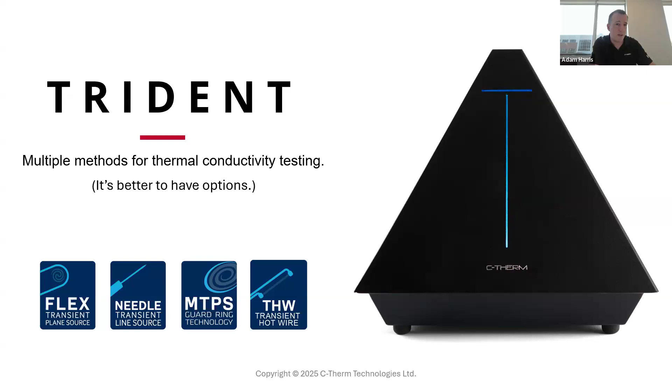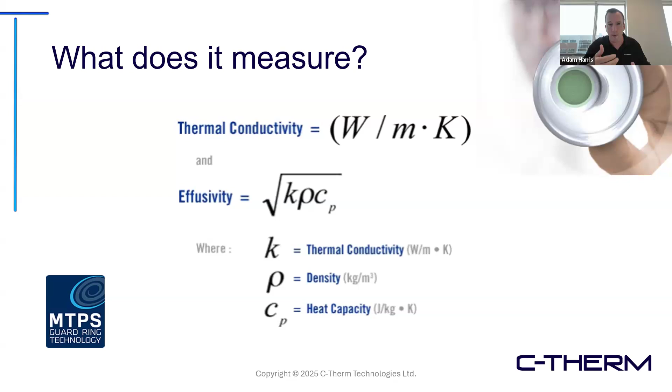It's sensitive to composition. So when we talk about fillers, this has a very significant effect in terms of the dispersion or distribution of the filler in the material. It's sensitive, if you're looking at powders, to the crystallinity, to the morphology, to the shape and size of these things, the densification of the material. All of these work together in influencing the effective effusivity of the material, which is one reason we like it in a lot of different process monitoring applications.

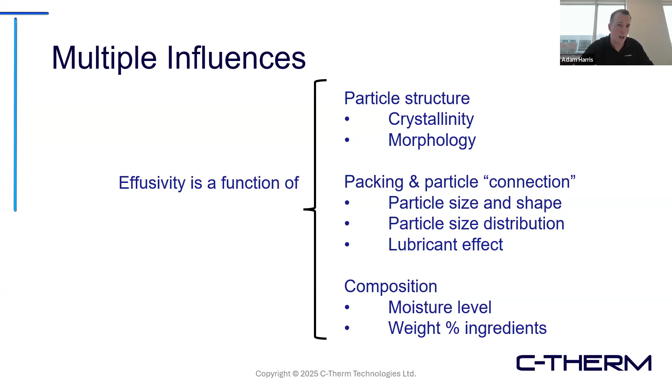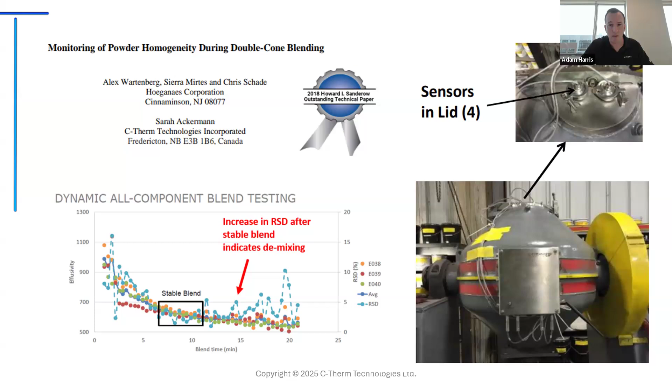These sensors were originally developed, in fact, for process monitoring applications, the MTPS sensors. Brandon's going to detail how those work and what they look like further in his section. But I wanted to reference some of the previous work we're building on year over year, presented by the team at GKN Hoeganaes and some of the research staff at C-Therm.

I want to transition now more into the current scope of this collaboration, but first provide a little context on how it started. This collaboration really began about 4 years ago. C-Therm Technologies is an expert in sensors and thermal conductivity measurement, with applications ranging from lab environments to process monitoring.

bdtronic, as I introduced earlier, is an expert in machinery for dispensing these types of materials in production environments. Their list of EV manufacturers using their equipment is a who's who of the major industry players in that space—very impressive technology, very high quality. We knew when we were looking to explore this space that we wanted to work with a really reputable group with a strong reputation and significant technology in their dispensing equipment.

That really attracted us to bdtronic, and in particular the opportunity to work with Dr. Jan Mies. Jan's team then introduced Till's group, Forvia HELLA, which is one of the largest tier one manufacturers in the world. Till brings tremendous domain expertise in his own right to this area. This has created a strong collaboration group that we've advanced significantly through multiple trials and some iteration you'll learn more about in today's presentation.

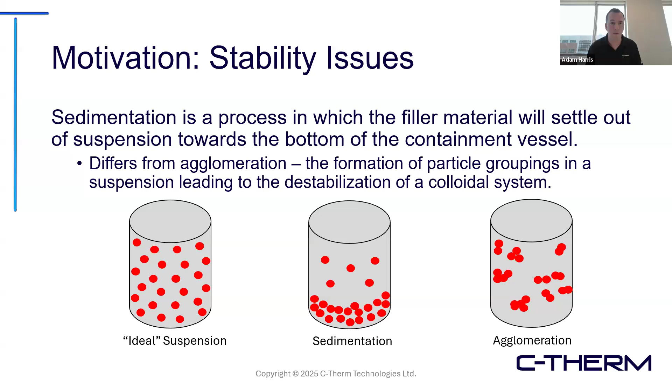This was the motivation for us and speaks to the work we're going to introduce. I've taken up more time than intended on the intro—I get excited about this stuff. There's a lot we want to share, but I'm going to pass this over now to my colleague, Till, who's going to join us on camera. Till, I'll ask you to take it from here.

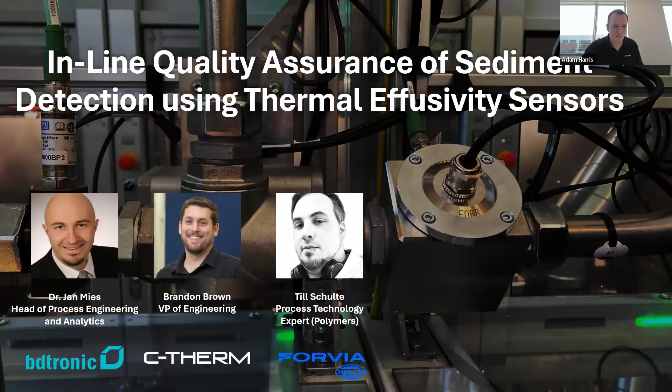Thank you very much, Adam. Hello everybody. To start and get a bit deeper into polymer technologies, I'd like to begin with the usage of polymer materials in automotive electronics. It's mainly categorized into 3 sections, besides some special applications we'll get deeper into.

We start with bonding or sealing—structural gluing for components, as well as vibration dampening of big components on PCB, for example, as well as sealing of housings or connectors for encapsulation of electronics. Common materials here are normally pasty silicones, epoxides, acrylates. This depends mostly on the requirements and test specification.

The second one is potting and encapsulation. It's normally used as humidity and dust protection, often when a complete sealed device is not possible due to any kind of reasons, and it's also protection against aggressive mediums like transmission fluids, for example. There, more low viscous silicones are used, as well as polyurethanes or epoxides, and this depends on the medium used and the requirements there.

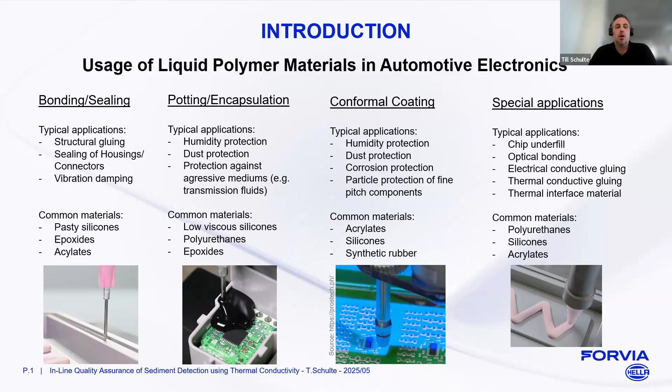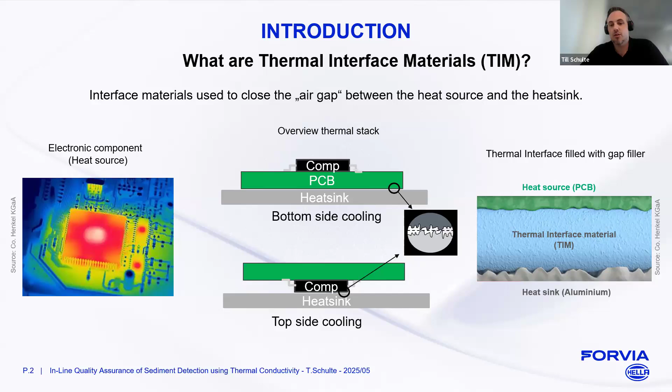These materials have, due to the formulation, some negative aspects. Normally, they're known to be highly abrasive, they are pressure sensitive, and they tend to settle down, so sediment over time, which could lead to significant application issues like downtimes or higher scrap, as well as even higher wear and tear of your entire dosing system.

The material consistency and homogeneity is crucial to really perform a stable production, as well as a reliable thermal management of the produced part, for sure.

The inline monitoring of the material characteristics, especially the thermal conductivity, and perhaps as well kind of settlement detection, is a good opportunity to really measure the behavior of the material inside the material pipes, the tubes, the pumps. But for sure, any sensoring solution needs to survive this challenging condition.

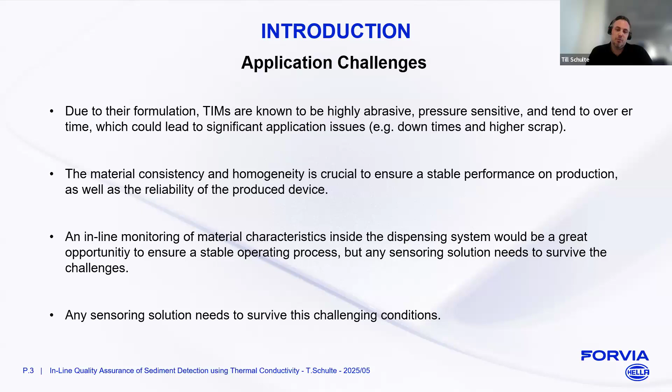To go a bit deeper into these materials, Dr. Mies will now go into the mechanical and chemical properties of these materials, as well as the processing of these materials. So he will introduce you into dosing of these materials.

Today I want to bring you a short introduction to spoilage pathways when it comes to automatic adhesives.

Jan, sorry to interrupt. We're having a little bit of difficulty with the mic. Let's take a moment to troubleshoot that. It was working perfectly during the warm up, but can you speak again? Maybe we switch from your headset. Let me check. Test 1, 2, 3. 1, 2, 1, 2. Much better, my friend.

Okay, perfect. Please continue. Okay, so let's jump right in. Sorry for the inconvenience. So to make it brief, we want to talk about spoilage pathways in adhesive applications.

On the next slide, I bring you a brief introduction in how an automatic dispensing equipment could look like. I divided it into two sections. On the left-hand side, you can see an application system for non-self-leveling materials. Here it's a system where we pump the material directly out of the container into a hosing system, which feeds the material directly into a dispensing setup with a static mixing head.

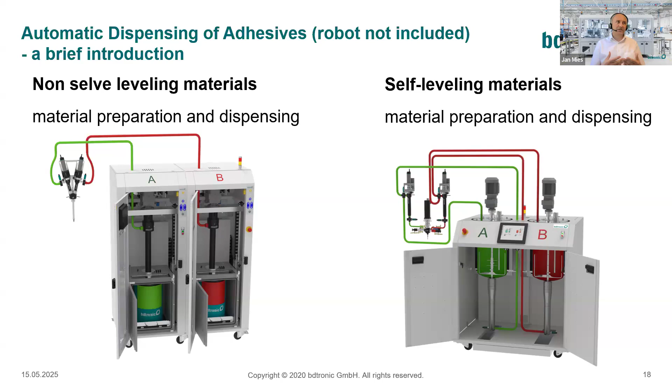But to understand what kind of spoilage mechanisms we have, we need to divide the materials not into chemical classes, but into their rheological patterns. That means how is their viscosity. So on the next slide, please.

This is a brief introduction to self-leveling materials. I think Till already presented some applications there. The viscosities lie between 5,000 and 60,000 millipascal seconds. They are designed for applications like PCB encapsulation, dam and fill process, potting of inverters or battery cells. They are designed for an ideal flow inside the part, but they bring some aspects with their flowability, that is the tendency for sedimentation.

Normally those materials are made out of a polymer and filler particles, and since the viscosity is so low, the filler particles have a tendency to sediment, not only in the original containers from your supplier, but also in the automatic dispensing equipment.

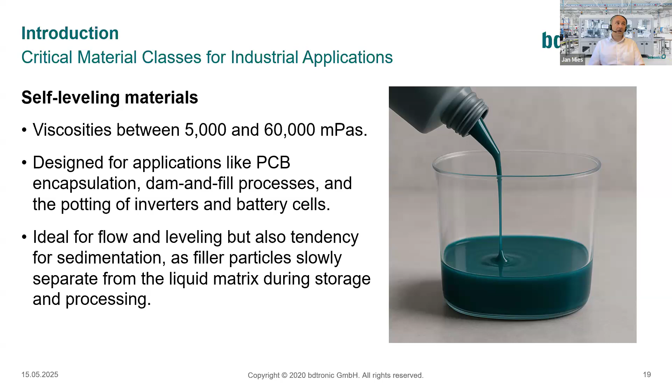On the next slide, I highlight a little bit the highly filled thermal interface materials, which are made for heat management of electronics. I think Till presented a nice slide how those materials do their job on the electronics itself. As you can see, the viscosities are much higher than with the self-leveling materials, typically between 250,000 and 800,000 millipascal seconds. They are normally engineered for thermal management in electronics, PCB assemblies, and, which is more or less a newer field, battery systems for heat management.

Cars and other mobile applications use these materials, and the main feature of those materials is that they are really highly filled. I'll highlight that because later we'll go into a deeper understanding of what consequences come along with that very high filler content. Especially, the challenges in production lines are the difficult handling characteristics and reduced flowability. As you can see in the picture, we're talking about pastes. They don't have a real tendency to flow, which makes them, in some aspects, a challenge in automatic production.

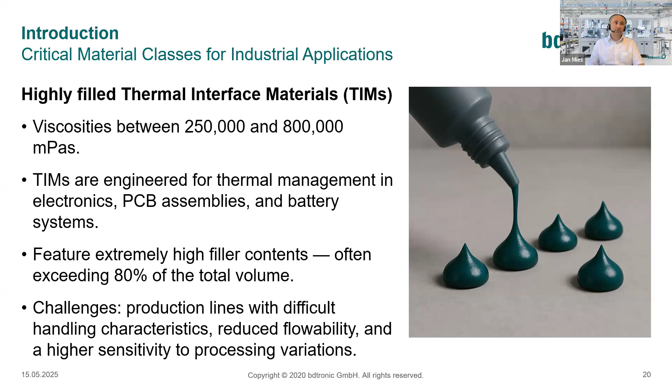On the next slide, we jump right into the first spoilage mechanism, which is typical for low viscosity materials, as I showed on my second slide. A typical phenomenon is sedimentation. The material has low viscosity, and it tends to sediment not only in the original container but also in the automatic equipment. This example shows a typical phenomenon where, with a low vector of speed inside a hosing or piping system, filler particles tend to sediment.

It's like a three-step way into madness, I'd say. First, it starts to sediment in areas with low vector of speed, and those aggregates build up until they reach a certain thickness. In the second step, such particles or aggregates can get mobilized again, and get transferred and transported through the hosing and piping of the dispensing equipment into areas with a narrow diameter, such as a nozzle or a valve. When such a particle moves into that position, it can block the system and cause downtime in the equipment.

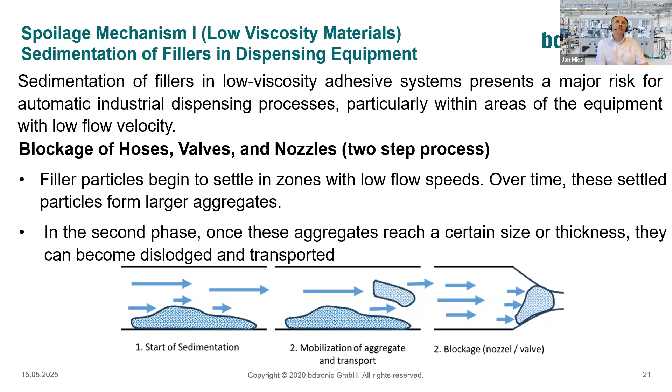On the next slide, I'll focus a bit more on the characteristics of losing filler content somewhere in the equipment. Not only can this cause downtime in the equipment, but this filler material is also critical for the mechanical and thermal performance of those potting materials, those self-leveling materials. If you lose them somewhere in the equipment, your final product can differ from specification in terms of mechanical or thermal performance.

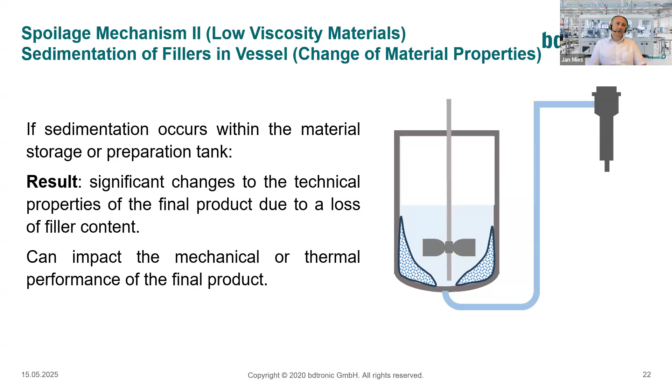So, what is the conclusion for those self-leveling materials? What do you have to do in automatic equipment? It's very important to have continuous material movement with a moderately high flow velocity. That means you have to agitate those materials, which you can see on the right-hand side in the picture. You have to thoroughly agitate everything and avoid any shadow zones in the vessel or container.

Second, it's very important to recirculate the material. As you can see on the right-hand side picture, we transport the material from the feed pump, directly underneath the vessel, into a hosing system which feeds it directly to the dispensing pump. We feed more material to the dispensing pump than we need, so there's a constant flow of material. What the dispensing pump consumes gets injected into parts, but most of the material gets transported back to the tank, forming a closed loop so the whole system has continuous movement, avoiding the sedimentation mechanism.

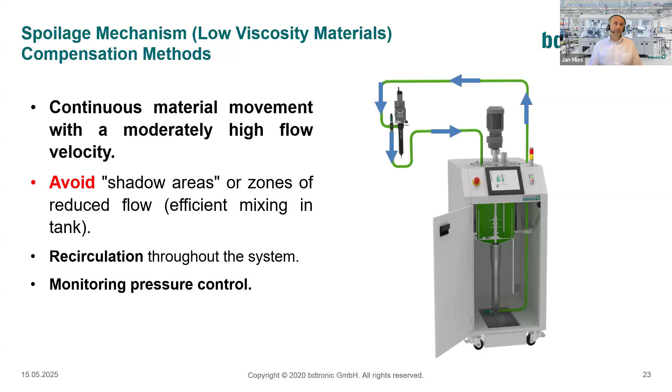On the next slide, I want to talk a bit more about non-self-leveling materials, especially the thermal interface materials that Till already presented. Those thermal interface materials are particularly sensitive to the loss of polymer matrix. Remember, I said the filler level of those materials goes up to around 80% or even more solid filler. So a loss of even a tiny bit of polymer matrix could jeopardize flowability and drastically influence the rheological properties of such materials.

So what is a complete showstopper for such materials is when there's leakage in your hosing and piping, where joints and sealing elements are not completely dense toward transport of the polymer matrix. A very prominent chemistry class for such materials is silicone—silicone as the polymer matrix for thermal interface materials. These silicones have a tendency to creep through every tiny insecure joint and sealing element. And what will happen when you have such a small leakage?

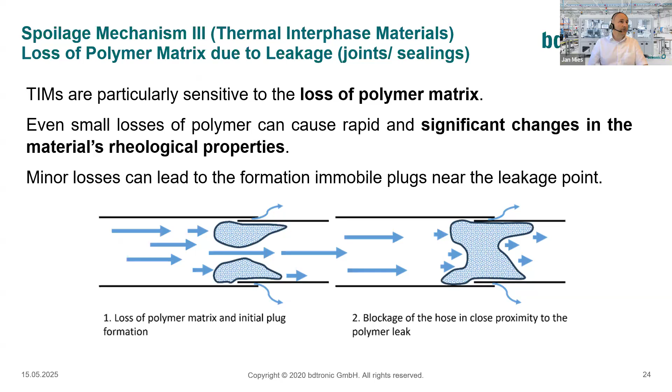Okay, so on the next slide, oh, this is the previous one. I will highlight a bit of what Till already mentioned, that those materials have a tendency of sedimentation and are intrinsically sensitive for separation effects. Why is that so? Remember, these materials have a very high filler level, and in order to get them stable, the formulation consists not only of the polymer matrix but also certain additives, like wetting reagents. Those wetting reagents cover the surface of the filler particles so they have a certain interconnection with the polymer matrix to get a stable formulation over time.

This is a sensitive equilibrium that those materials form. That means over time, they have a tendency to form a gradient in the original container. That's one aspect we will see later in our results. The second aspect is that they have a tendency to de-aggregate, to separate under shear stress or high pressure feed in such systems. So this is also something we have to address when we want to process those materials in an industrial environment.

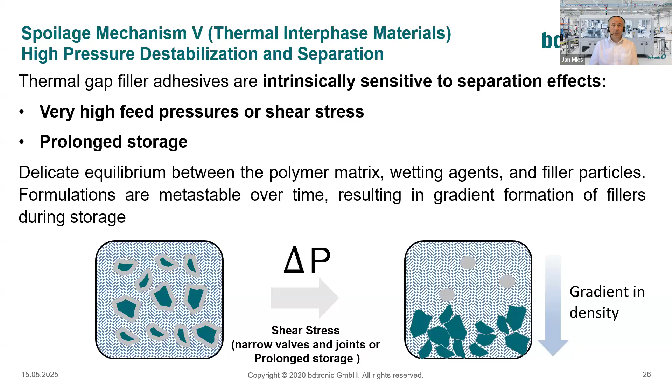Okay, on the next slide, I will sum up the pathways. We have various mechanisms for material spoilage in those 2K adhesives. I highlighted self-leveling materials or thermal interface materials, which are the most pronounced or prominent material classes for such problems. One is the sedimentation effect, where filler particles start over time to sediment in low flow areas, causing blockages or inconsistencies in the formulation later in the final product. We have the polymer matrix loss, meaning leakage of polymer matrix on seals or in close proximity to the follower plate. And we have that intrinsic instability, which leads to a gradient in the original containers, and the sensitivity towards high shear stress and high feed pressures.

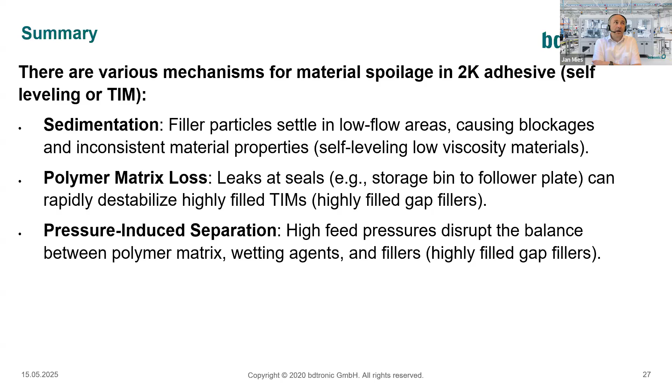That's the end of my part of the presentation. I have some conclusions to tell. What are the key strategies to rule those things out? For the sedimentation effect, avoid low flow or shadow zones in material handling systems. That's very important. Ensure constant material movement with a medium to high speed vector, and especially for thermal interface materials, minimize transport pressure and transport shear stress.

Especially when the system is idle, don't put too much pressure on the original bins so that you don't lose any polymer matrix. Very important: monitor and secure all sealing points in such a machine, and control the feed pressure to maintain material stability.

That means you need to pump the material under pressure. Of course, otherwise it's not feasible to process those materials. However, keep the pressure on those materials as low as possible, and monitor the pressure at several points in the dispensing and metering system.

A very important aspect is also to monitor the metering of the dispensing pump over time.

That's the end of my part. And I will pass over to Brandon, who will present our results at Forvia along with Till. I'm happy to see what he will show us now. Thank you.

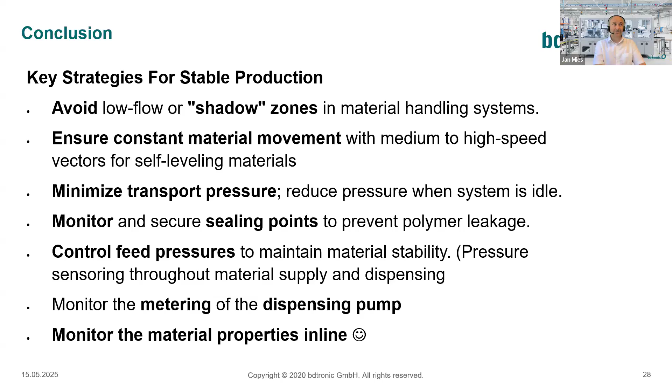Thanks, Jan. As Adam already introduced me, I'm Brandon Brown, VP of Engineering at C-Therm. First, I'd like to give you a bit of an orientation on how the MTPS sensor operates.

The MTPS sensor is a non-destructive technology. It was first developed for process monitoring in powder manufacturing, such as pharmaceutical industries and metal injection feedstock. The patented guard ring forces the heat flow to be in one direction. The sensor coil provides the main heat pulse into the sample and is simultaneously monitored as the temperature progresses. Generally, the slope of the temperature over the square root of time will quantify a sample's effusivity.

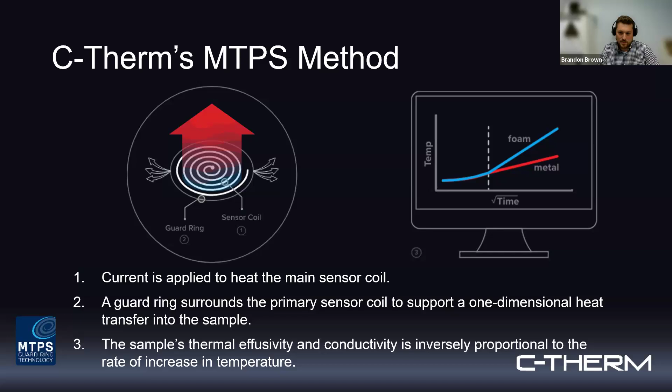Samples with high effusivity, such as metals, will show a lower temperature slope, while something like a foam will show a higher temperature slope. This is very similar to actually touching materials. Just looking at my desk, if I touch a plastic pen and my metal water bottle, the metal object will obviously feel cooler, and this is actually the effect of thermal effusivity. Next slide.

Taking a look at the anatomy of the MTPS sensor, the sensor is made of stainless steel, which provides durability, resistance to various environmental conditions, and broad chemical compatibility. The sensor chiplet uses interfacial thermal reflectance to its advantage, helping it measure a wide range of materials, everything from aerogels to metals and everything in between. Importantly, the chip itself was also designed to be chemically stable, since us engineers and scientists seem to like to make products that are not always friendly to many types of sensors.

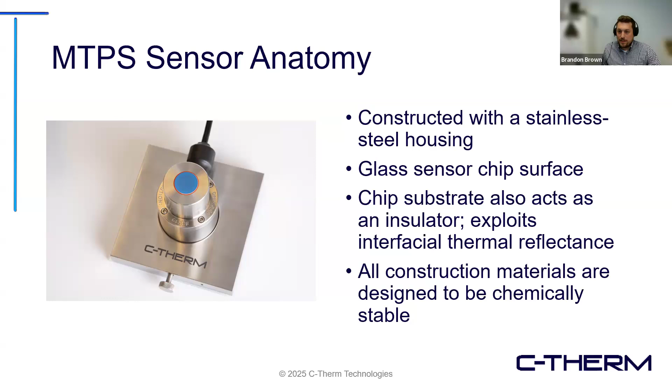Next slide. Previously, most of our work in the filled polymers domain has been in formulation development and checking filler dispersion during the R&D or qualification phases. The biggest challenge the composite folks have in formulation of conductive fillers is getting the distribution right, and then taking something that was done in a lab environment and bringing it to the production floor.

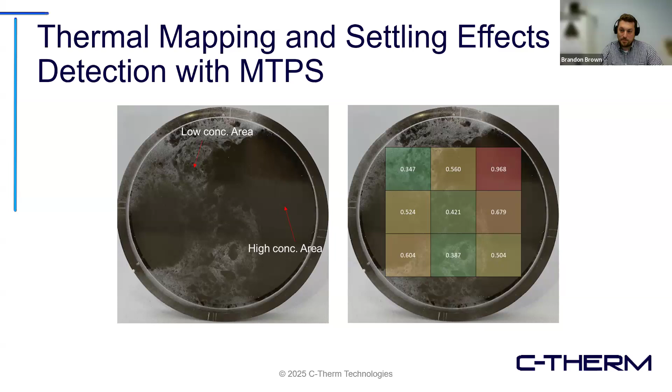Next slide, please. From top to bottom, this is actually a similar problem. Hopefully you can see that there's a slight gradient through this sample - you can see it better on a bright monitor - but there's a gradient between top and bottom. If you were to measure the sample using a steady state method, you would only measure the average through the sample. This is exactly what happened to a client of ours.

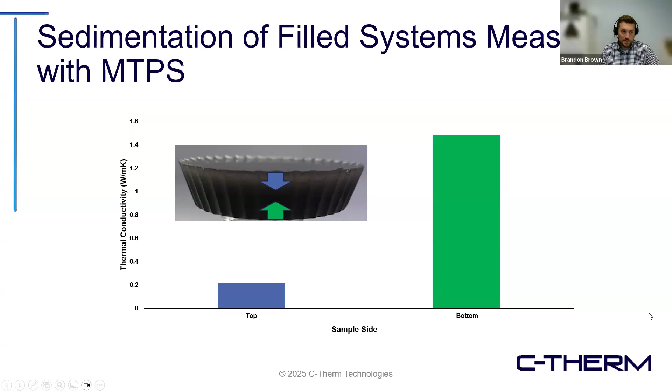We had one client who had two groups within the same organization, the R&D and the production teams, where the R&D group was telling the production team the QC samples were passing, and the production team was telling the R&D group that they were seeing material failures. The root cause was later determined to be that settling had occurred, which was only possible to see using our MTPS single-sided transient technique, where we measured each side separately. In this case, you can see there's an order of magnitude difference in performance just due to settling during curing. Next slide, please.

One more example before I get into the results. This was testing we performed for HB Fuller, where they wanted to obtain insight into the thermal performance of their adhesives in both cured and uncured states. In this case, these adhesives would then be used in EV battery packs.

There are many methods that can measure fully cured samples because the samples are quite stable. You can make the sample, cure it, easy peasy. However, uncured, you want to have very quick data acquisition. It's very important if you're trying to measure something before the curing process occurs.

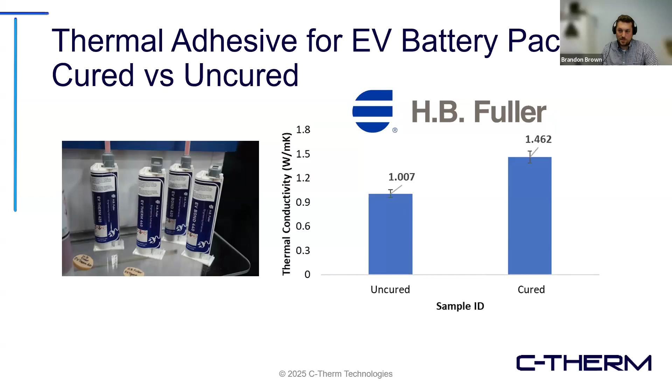We've generally seen an upward shift in thermal conductivity in many of the adhesives that we've tested as they cured in the past, and this was also the result found here.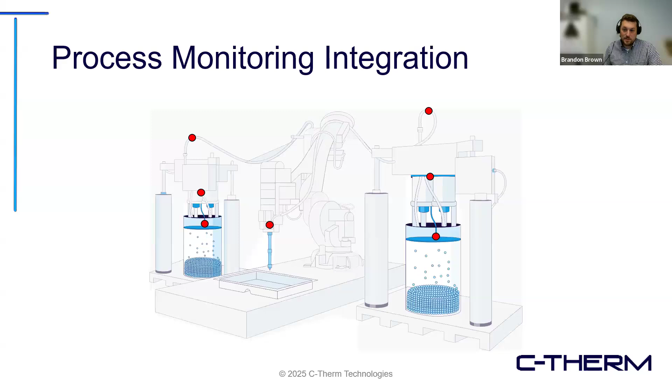In partnership with bdtronic over the past few years, we've experimented with a lot of these locations.

Here we can actually see one of the prototype sensors we've used and a picture of the follower plate that we'd integrated it to. Over the span of the study, we tested 2 locations on the follower plate, generally just testing different radiuses along the follower plate.

And sometimes science is fun. Here's Jan and I having a Breaking Bad moment in one of bdtronic's lab research spaces.

One of the big benefits to measuring on the follower plate is that the pressure was very near ambient in the bdtronic equipment, and we're able to get a good reading on the top layer. However, not all the material passed over one spot on the top plate, because if you're measuring here, the material on this side doesn't flow over it.

So another location we tested with great success was just at a valve, right below the pump. This again had the benefit of being at near ambient pressure conditions, but also had all the material being processed passing through this point.

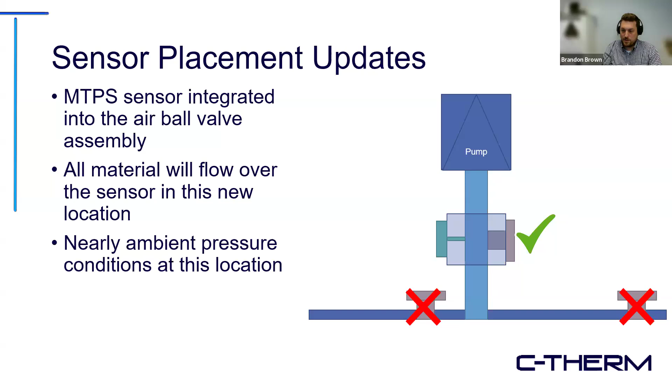Anyone can measure something good and get good results, but we wanted to make sure we can measure bad things too. So the results of the measurements here are the smoking gun we'd been hoping for. The buckets we've been testing were purposely expired.

So testing a bad material and getting bad results in this case was a good thing. It means we can detect good versus bad. If I recall correctly, these barrels were donated to us after not being stored in accordance with the manufacturer's directions, and it was also well past the expiry date.

Again, based on our experience, we'd expect the thermal performance to increase as the material cures. So this is the material as it's being transported through the pipe in an uncured state.

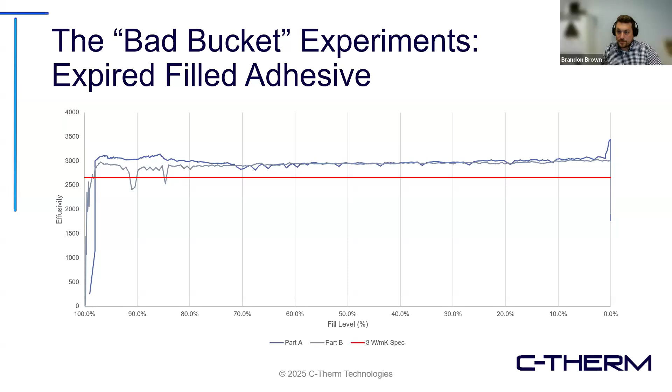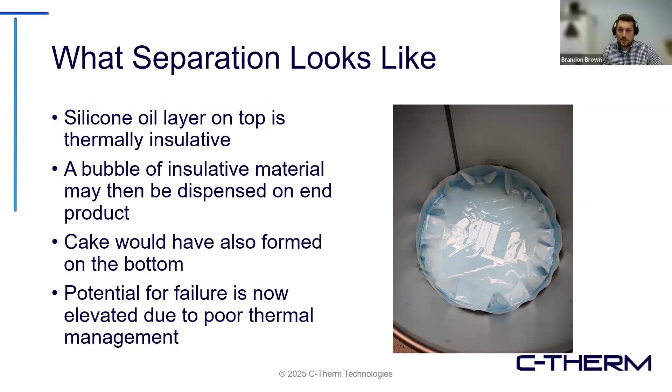So just a quick summary of some of our initial testing here. This was over the course of, I think, 2 years.

We also tested to see if the material moving across the sensor had any effect. This was basically to show that static testing with the pump stopped versus dynamic testing, like with the pump running, demonstrated it had a negligible 3% bias during normal operation, and even increasing the pump speed to 20%, which I believe was the maximum nominal operating speed for some of this equipment, it only showed a further 1% bias in the results.

During the good or stable middle section, the material generally tested between 2,800 to 3,200 effusivity units, which is roughly equivalent to a thermal conductivity of above 3.5 watts per meter Kelvin, which is better than the 3 watt per meter Kelvin specification.

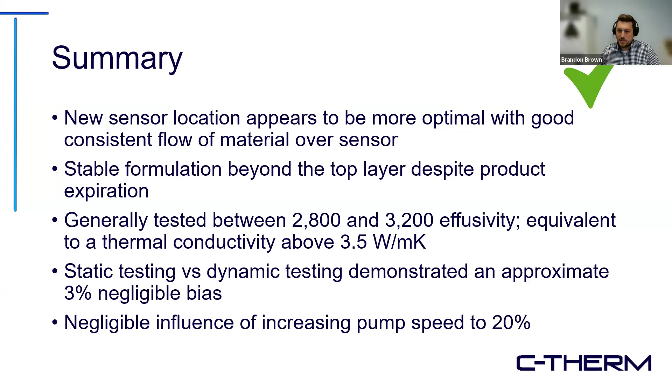So now we'd established that the sensor can detect inconsistencies in the material's thermal performance during processing. bdtronic reached out to HELLA Forvia and pitched the idea of running the study in a live production environment.

Moving this forward, Jan and his team at bdtronic created a custom adapter block to integrate the sensor in the hose below the pump, and you can see it installed here. You can also see the control box we've mounted nearby. The sensor was situated in the pipe, where all the material processed from the bucket would pass through.

During some of the initial testing after installation, we checked again and we saw we were able to successfully measure the material's effusivity without slowing down or requiring a stop of the pump, at established pump speeds required on this production line, which was super important because we weren't allowed to stop production. That said, the material flow rate was relatively low. I believe it was something like a small number of grams per minute.

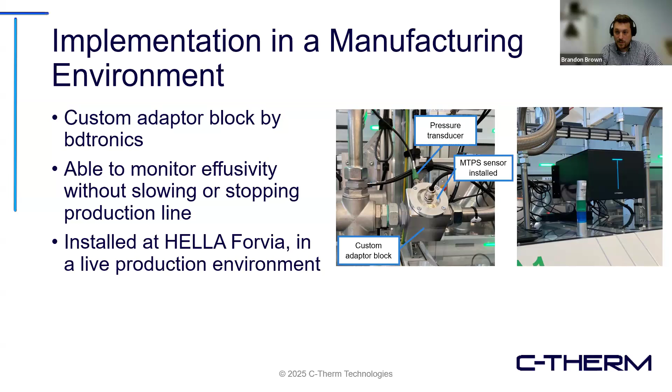Here we see the sensor, with some modifications for this specific implementation. At this new location, the first concern was that it was required to withstand a one-sided pressure of 12 bar, or about 175 psi for us North Americans. It took some thinking to get past a few of the devilish details, but we ended up finding a solution.

The sensor was also modified so it could easily be inserted and removed from the adapter blocks, and a gasket was used to make sure there's no leakage.

During all of these studies that we've been doing, we've been concerned with and monitoring sensor abrasion. There are some after-action pictures later, but the abrasive nature of the filled adhesive really shouldn't be understated here.

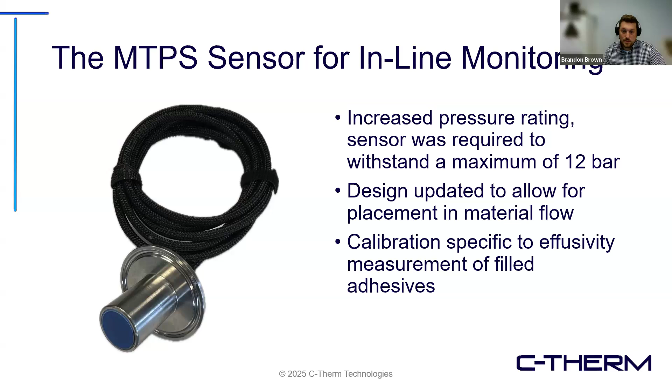So finally, data. Here's the first trial installed in one of the production lines with filled adhesive, very similar to the expired bucket that we had earlier, but this is not expired, obviously. This was collected with Till and his group at HELLA Forvia. This is just one run.

Many of the runs of this #1 sample looked similar. Again, the cured specification line is shown, converted using the heat capacity and density from the TDS. The filled adhesive here is what I'd consider very well behaved, and I suspect it's also priced appropriately.

Again, from what we've seen in the past, as a material cures, the effusivity and conductivity would increase after curing, meaning the material shown here would still outperform the specification. This is great news for Till and his team.

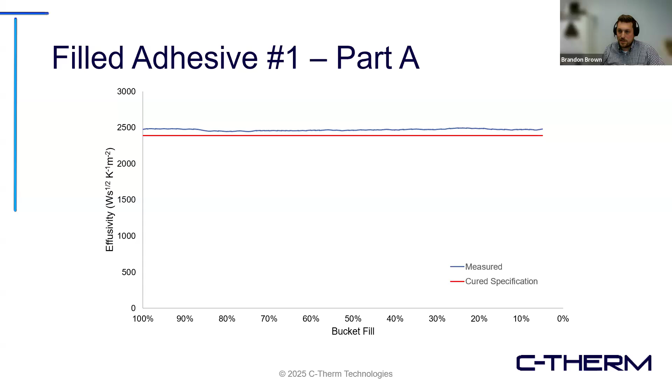So moving to another production line and another filled adhesive, I've overlaid a number of pails here which were processed to show the variance of the second filled adhesive. It had some different properties, different viscosities. Again, this was mounted above the pump in a pipe where all the material processed from their pail would flow through.

So here, the red line represents a nominal value. There wasn't enough information in the data sheet to directly calculate the effusivity, but for the purposes of this testing, we were focusing on consistency anyway, so the nominal value was used.

I've highlighted 3 distinct zones here, zones of performance. From left to right, we have the start of a new bucket, which may be getting a bit of mixture from the end of the previous bucket as the material moves through the pump and the pipe.

In the middle, we have a zone of stability spanning about 80% of the pail, and at the end of the pail, where the filler would have settled, you can see a slight increase in effusivity. All of these pails perform quite well, but right at the start of one of the pails, which I believe is pail 5, you can see an off-nominal dip in effusivity.

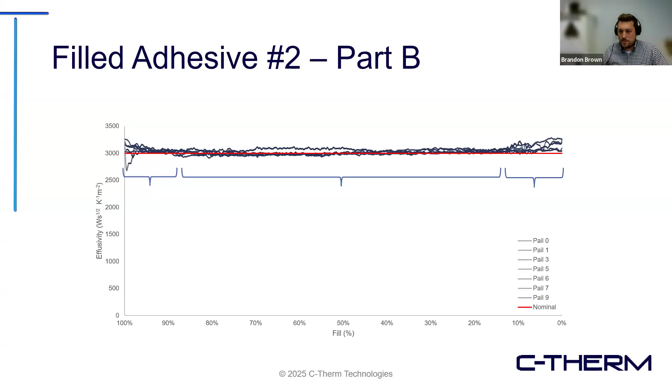Let's investigate on the next slide. Zooming in, this is just at the end of pail 4 and just at the start of pail 5. Here, instead of pail fill, the x-axis now represents time as it was processed, so you can see how pail 4 relates to pail 5. It appears that right at the start of pail 5, there's just over a 10% dip off nominal, and you can still see the increase in effusivity at the end.

Based on what we've seen from a few slides ago, I suspect this pail may have suffered from some settling and may have had a small oily layer, a silicone oily layer, on top.

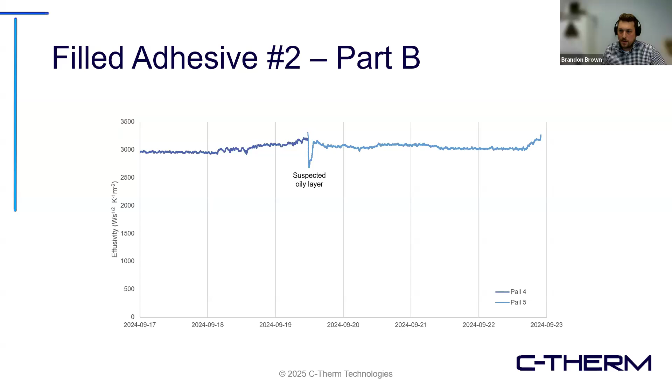Just to give a bit more insight into the adhesives, Jan has done a really good job. For those who've never used this type of filled adhesive before, you can think of it like toothpaste mixed with ceramic dust - very thick and gritty. After we'd gathered all the data and everything was completed, the sensor was removed and inspected, and we haven't seen any abrasion from our tests in any of our testing over the years.

One theory we had was that the material was moving slowly past our sensor, slowly enough that any abrasive materials actually rolled over the surface instead of ablating or abrading it. But the end result is that we didn't see any sensor abrasion, and Till's got some microscopic pictures in his section later on. Actually, it's back to Till.

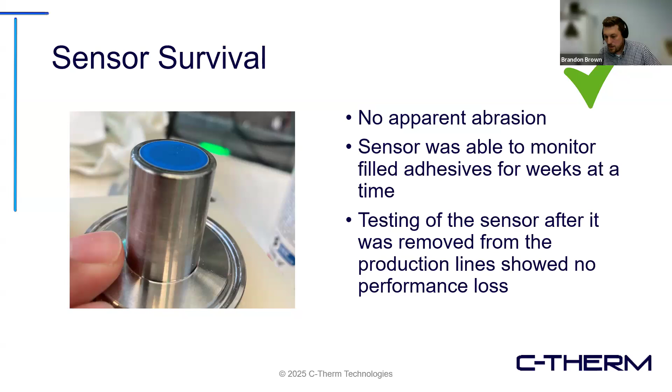Thank you, Brandon. Okay, so Brandon and Jan gave a lot of information. I would just continue with the test summary from the production side. The sensor delivered a stable performance under real, harsh series conditions.

It shows pressure stability over at least 10 bars - this was the pressure adapted to the system due to normal processing. We have no wear and tear on the sensor surfaces, as Brandon already mentioned. On the right side, you can see the sensor surface after our testing period in different magnifications. The upper one is 20-times magnification, and below you see 200-times magnification. There are really no scratches visible.

We got reliable measuring results at two different dosing setups - meaning two different dosing speeds and flow speeds of the material through the sensor surface - as well as two different materials. We have an easy plug-and-play installation due to the retrofit adapter, and we got confirmation of the theoretical material behavior inside the material system, because you couldn't look inside for sure.

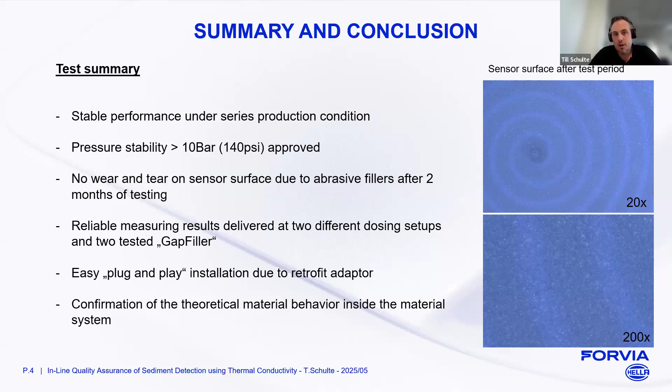Next slide, please. This brings me to the potential benefit for production, as well as the real failure pictures, to bring the theoretical behaviors and challenges of these materials into reality.

In this case, you could detect the filler change, but by then the material is already processed, meaning the complete system - from the preparation system to the dosing head - is full of material with a higher filler content, and it's sometimes already been produced. This means you have to flush the complete system, which normally takes around 1.5 hours per event. This depends, for sure, on the setup of your machine and the length of your material pipes or tubes.